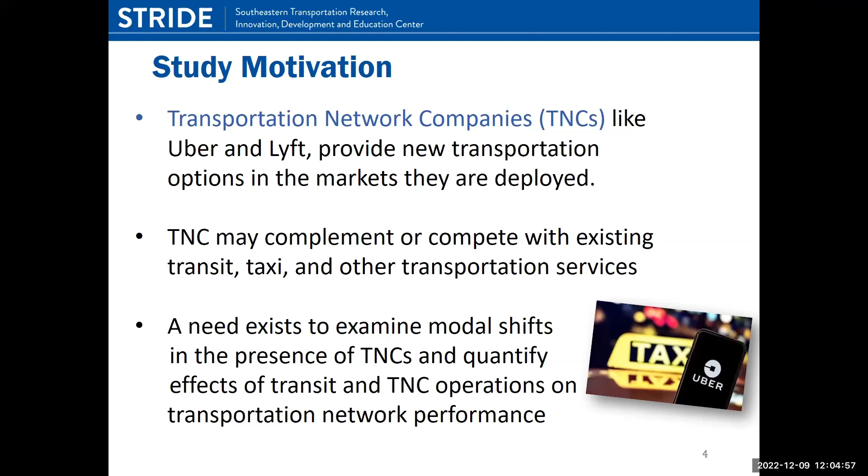So given all these earlier conversations around the impact of TNCs on traffic operations and transit, we identified the need to examine modal shifts in the presence of TNC services and quantify the effects of transit and TNC operations on transportation network performance. The objective of our project was twofold. First, to study the influence of transit and TNC operations on the choices of individual travelers, and then also to assess the impact of those choices on the performance of the transportation network.

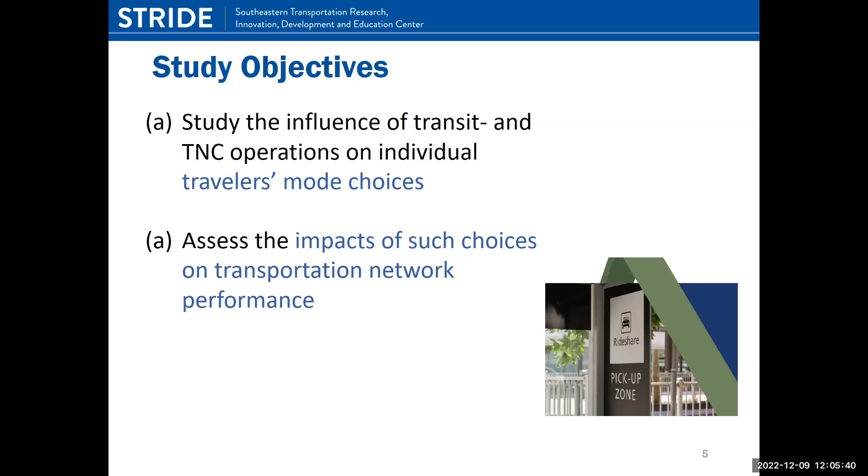In order to meet our study objectives, the research team performed 4 interrelated case studies that used Birmingham, Alabama, and Miami Beach, Florida as the test beds, and the MATSim agent-based simulation platform for modeling. We first collected user travel preferences data, then we developed novel methods for calibrating MATSim models using the mode split behavior model, as well as real-world traffic counts.

We also collected and processed Uber trip level data using crowdsourcing in order to address the lack of publicly available TNC data, and also modeled ride-hailing operations in addition to automobile and transit trips in the same simulation testbed. So our presentation will try to cover all these case studies.

I'll talk briefly about case study 1 that focuses on surveys of transportation users' attitudes and choices for ride-hailing services like Uber and Lyft. This case study used a questionnaire survey that was developed in Qualtrics.

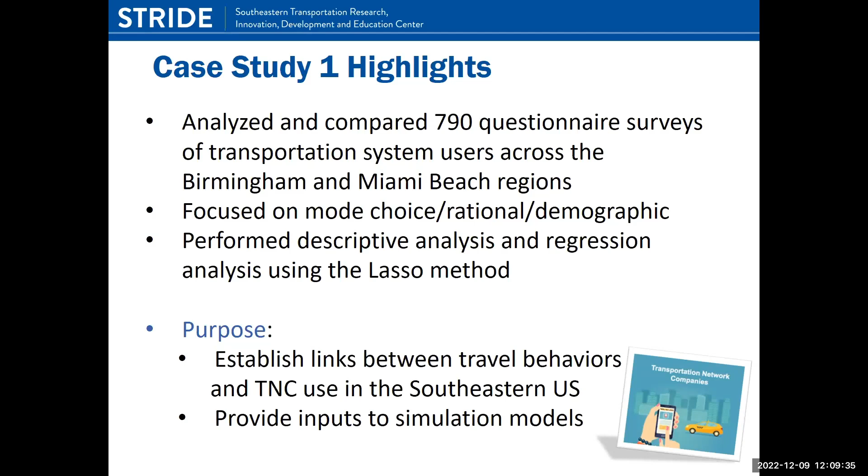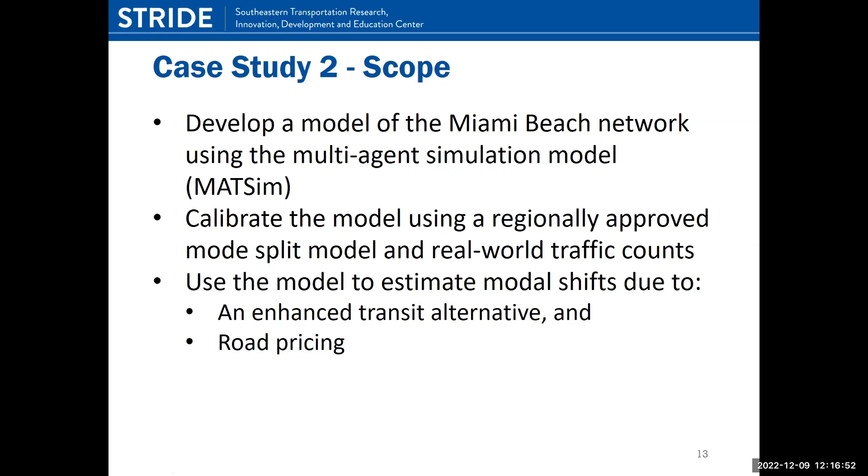By concentrating on a small case study of estimating mode shift due to enhanced transit service and also road pricing. The reason why there is some interest in multi-agent simulation is that existing travel demand models use static demands through the whole peak period, and we know that the demand varies.

The model also uses static assignment and static discrete choice model. By static discrete choice model, we mean that it is for the whole 3 hour or 4 hour peak period, and doesn't consider the variation every 15 or 30 minutes in the peak, deciding to do the mode shift or even an assignment, and also the trip generation and other factors.

Agent-based simulation uses traffic simulation and loops between supply and activity-based demand. So it provides a much more realistic and dynamic system.

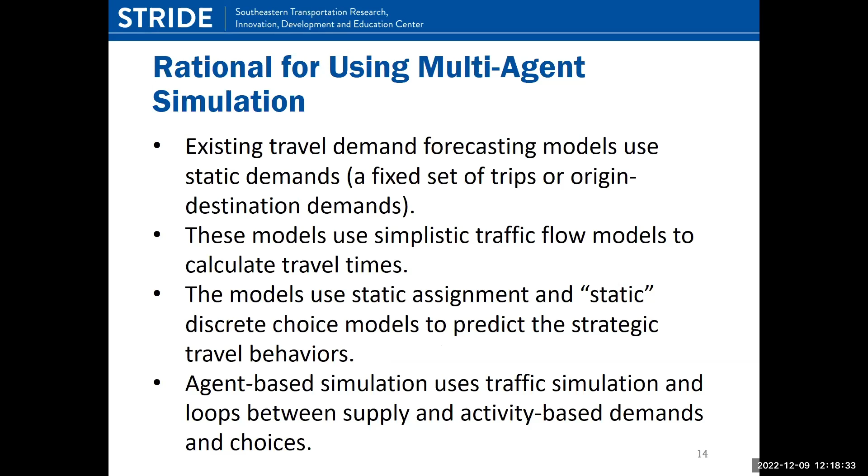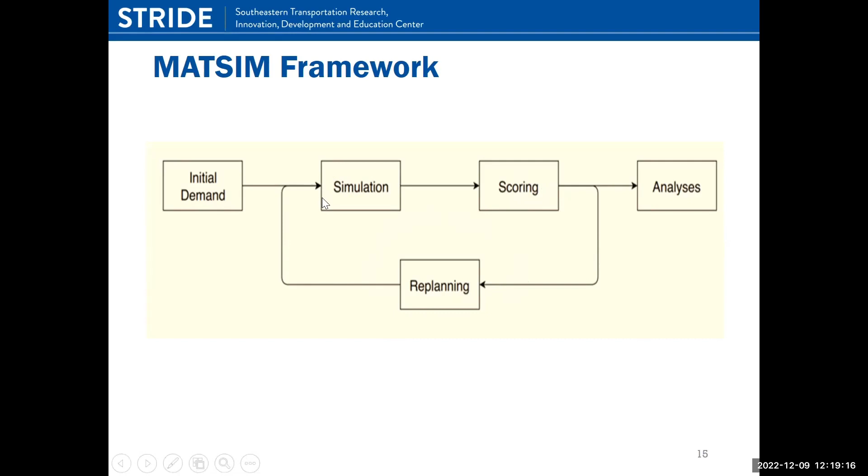A simple explanation of the framework is we start with an initial demand, go to the simulation, and it has a scoring function within the MATSim open source tool that scores the trip alternatives for each agent or individual in the simulation, then changes the activities of that person based on the scoring for that period of time. Then it iterates in the replanning step, going back and changing the mode choice, the demand, and shifting even the time of trip generation during the day. And this is the network.

It has a very congested network. Miami Beach has a mix of traffic, a lot of tourists, and also causeways - those ones on the left side. These causeways connect Miami Beach to the mainland, Miami-Dade County or City of Miami mainland.

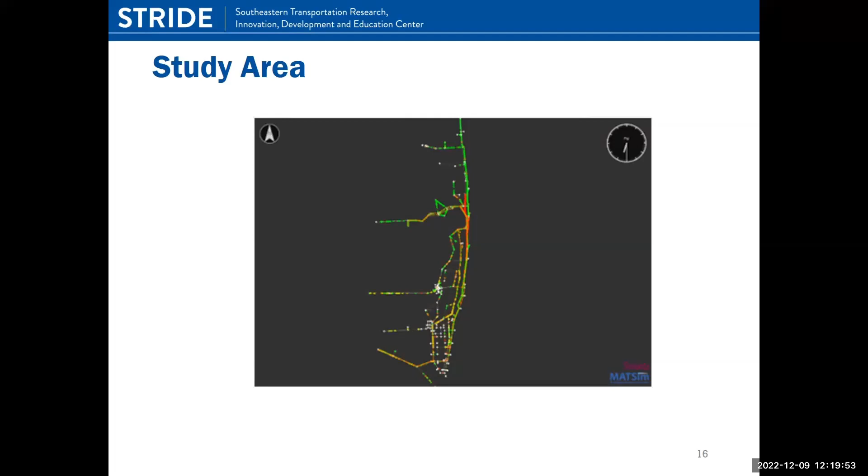So this is the area that we model. The data we obtained - the road network and demand model - we extracted from the demand model and converted to MATSim. Then we generate full day plans based on the activity-based model of the region's demand forecasting model. We also obtained information about public transit options like route profile, stops, departure time, service frequency, including bus services and local trolley, which is very popular with tourists in that area. And then we also have count and travel time data.

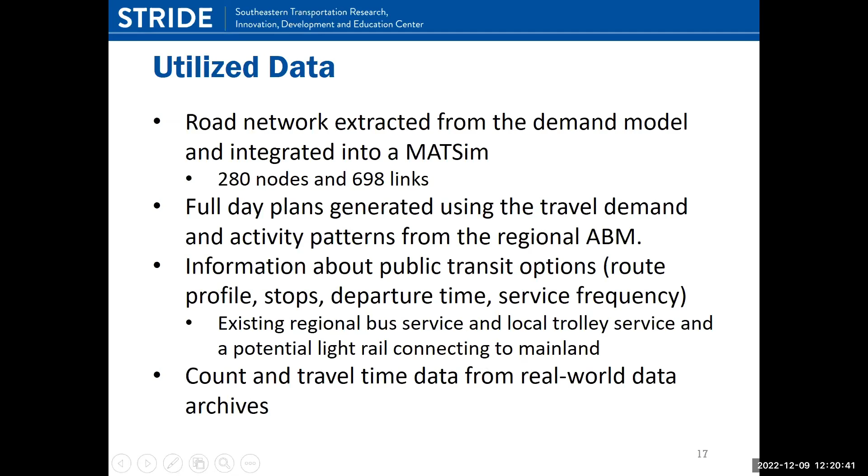Some of the parameters in the replanning strategies include the utility of time and money, and the utility of travel versus staying home, which is different for different modes, and then utility of distance and so on. These model parameters can be calibrated. Also, on the supply side, you can change the link capacity and the free flow speeds.

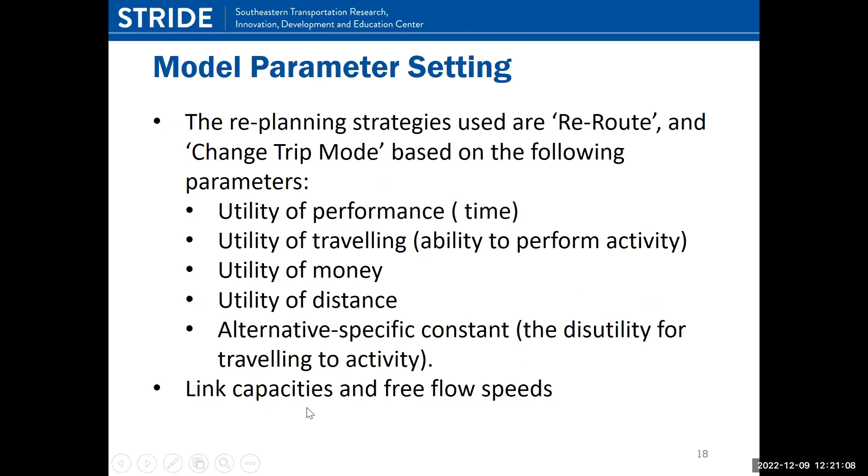This is just an explanation of the process of calibration. I'm going to talk about this in a little bit of detail. So one of the things that we did is to model in MatSim, as we talked about. MatSim has a scoring function, versus Cube which has a discrete choice model for mode split.

So what we did is perform an optimization to obtain scoring functions that result in similar results to what the Cube equation gives for the same static conditions. The idea is that the Cube equation is the accepted, calibrated equation for the region and so on.

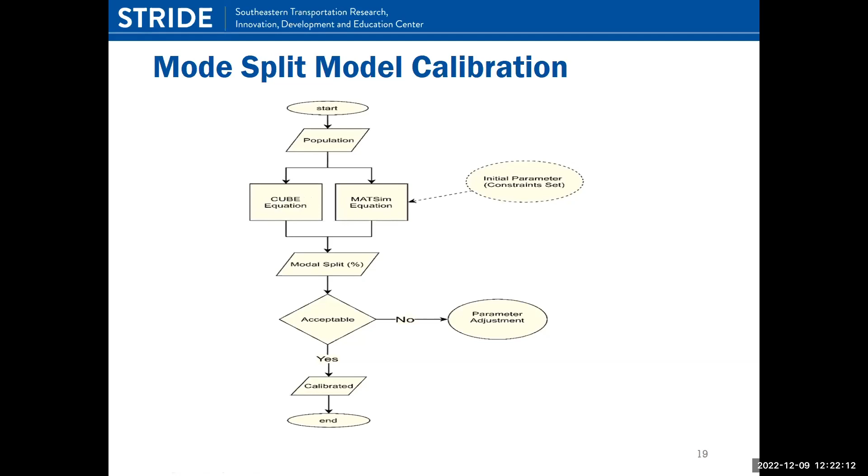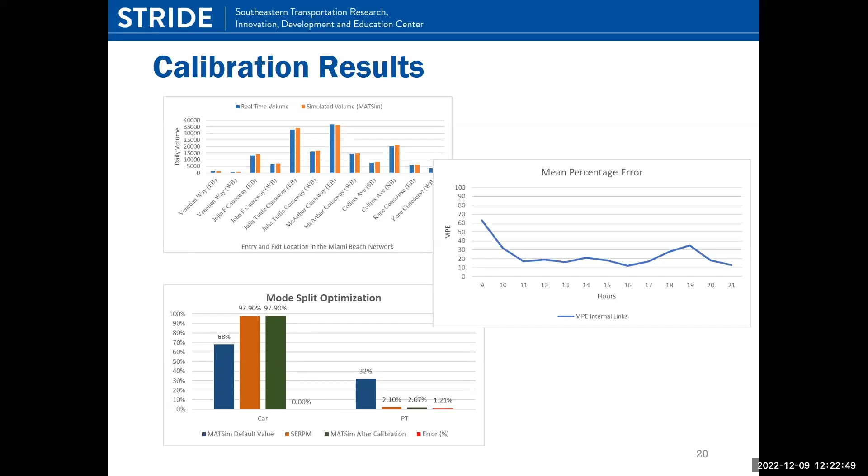We also calibrated the model for counts, and we were able to reduce the error, the mean percentage error, significantly. And even with the mode split, if we use the default values - MatSim was developed in Europe - so when we use the MatSim parameters without calibrating for the regional demand model, we obtained a 30% shift in mode split. It's 30% mode split, while it is much lower than this, about 3%, as we looked at.

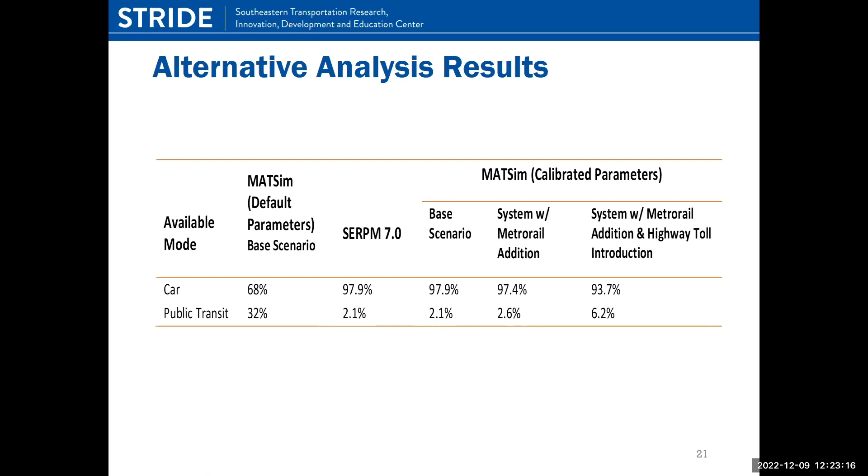Once we did that, the calibrated model produced results that are similar somehow to the SERPM model. And then after that, we changed the model parameters. We introduced a metro rail and highway toll to discourage people from using their vehicle, and based on that, we were able to see some shift in the demand.

So again, this was just a simple exploration. It is a significant effort to calibrate the model, but we were successful in doing that, and we found that it was effective based on traffic flow and mode split. The model was capable of estimating the shift toward public transit, and the effort could benefit from further fine-tuning of the MatSim model.

Further modeling is recommended of park and ride, kiss and ride, automated mover, first mile, last mile, collector, distributor, ride pooling, ride hailing, and micro-mobility options.

We actually tried to do some modeling of Uber, but we found difficulty in doing that, and because of the small budget and short time of the project, that was just an exploration effort. We decided to postpone introduction of Uber-type services in the model until a future effort.

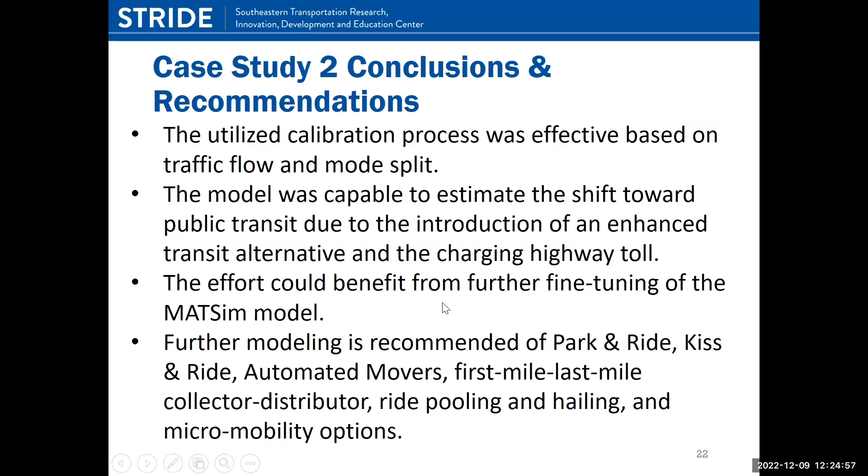The third part is about rich mode, in addition to private cars. We want to study what's the impact of, let's say, public transit, right? Buses and trains, and also TNC companies like Uber and Lyft, and how their impact is on the current traffic, especially since we are based on Birmingham. So how the new modes, the TNC companies and the public transit, are impacting the traffic in Birmingham.

We also explored new micro mobility services like e-scooters, e-bikes, shared mobility, where people can just use an app and grab an e-scooter and ride to their destination and just leave it along the roadside. So this kind of service, how it will also impact the traffic.

This is actually a collaboration with two teams as an interdisciplinary project between Dr. Virginia from transportation engineering and me from the computer science side. And of course we each have our groups. On my side, mainly Jalal is doing a lot of programming work, and we discuss those data science techniques to make things work. Jalal is also working on this kind of MATSim configuration.

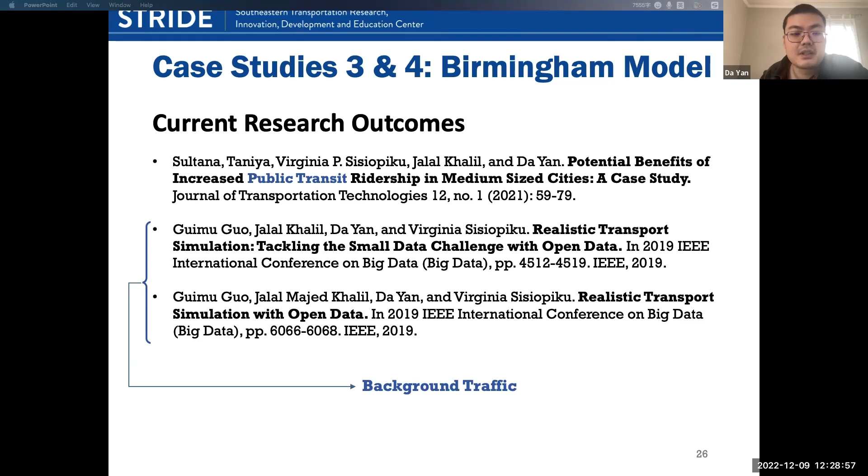So actually this research starts by needing to first generate the background traffic. We need to know the mobility habits and the daily travel plans for the population. Again, we are using MATSim, which is the blue box in the middle. MATSim takes, for example, the road network for executing their plans, the multi-agent plans for the entire population, and it's from OpenStreetMap, and also takes the day plans.

That's the major part that we're generating — we need to make sure the population day plans are realistic. It also takes some other things, like if you are doing transit, they have a sub-module for public transit. And if you're doing, for example, Uber, we are currently using a taxi module there — you can have a bunch of drivers keep waiting till there are passengers, and they will pick them up.

So the MATSim output is basically a list of events — what happens at which time, like somebody gets on the car, gets off the car, or turns left, turns right. All those details are actually recorded in that event file. Based on that event file, we can do all kinds of flexible analysis using data science techniques by writing Python queries to do some querying.

So again, even though the surrounding is MATSim, we are using Python mostly to do the data science analytics to generate the realistic plans or analyze the simulation results. The core code of MATSim is in Java, and oftentimes the modules are not that flexible, so we need to actually change their code and customize it to our needs.

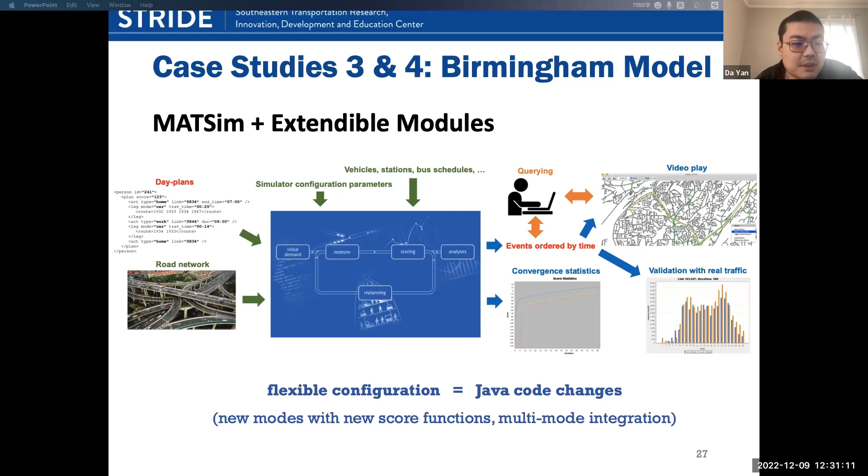Especially, for example, we have changes of some score functions, because if we integrate new modes like e-scooters and multi-modes are both integrated, then we need to adjust the original scoring function, which is the third step in MATSim in that loop. We also have a lot of configuration to do, and even need to change the Java code inside MATSim to make it flexible enough to work. And to study all those new modes, the first thing we really need is background traffic.

But to generate the agent-based simulation, you need to provide all those details for the entire population of Birmingham, for example. 500 people is not enough, so you need to extract their habits and then add back all those details. We really need diversified information. You cannot just scale 500 people to 50,000 by replicating them, otherwise they will all go from the same home to the same working place.

So, for example, we use OpenAddresses, the open data repository for all the addresses in Birmingham, in the United States at least. Specifically, our study area of Greater Birmingham contains two counties, Jefferson and Shelby, as shown in the lower left corner. We also use OpenStreetMap, which provides not only the road network but also amenities, so you can even find a Costco or a hospital or schools there. They provide a lot of rich POI, point of interest, information.

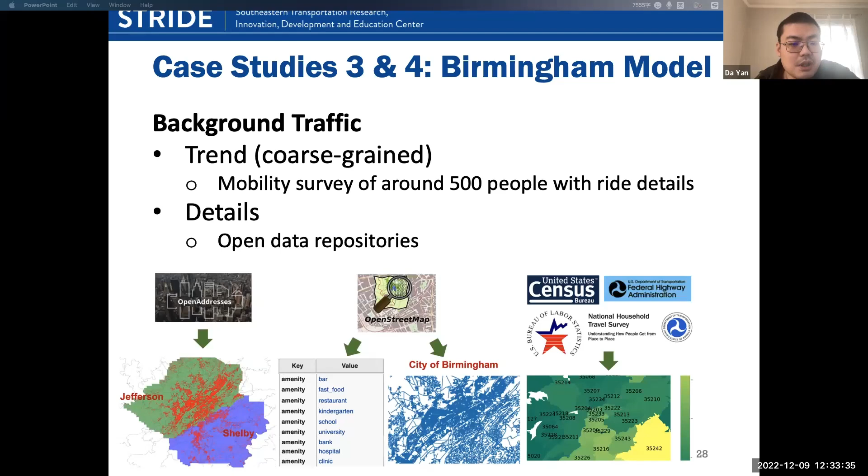We also have the American Community Survey and other information, so you can get the geographic and population density, etc. All of this helps complete the details of the plans we need to generate, on top of this small sample we have. But of course, we need to do a lot of statistical data science techniques to make them realistic.

We find that a lot of the traffic is generated by work, because if you think about the peak hours, it's really driving from home to work and from workplace to home. So we specifically model work as one of the most important activities. We also get the top employers from the Birmingham Business Alliance, the top 150 employers with a lot of employees. We assume this is representative of the work location distribution for Birmingham, and we generate a distribution following that, using kernel density estimation.

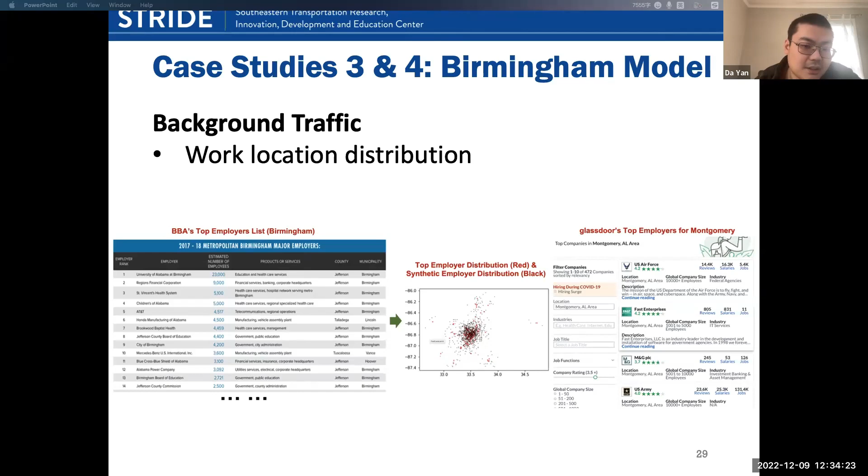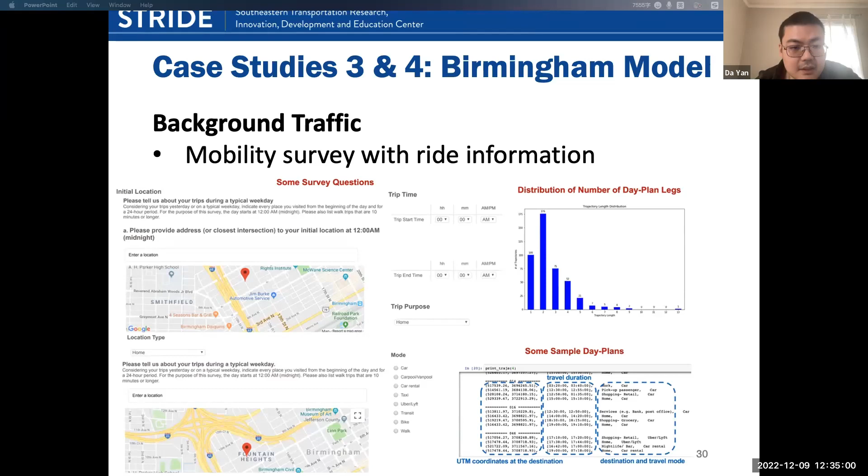We do some analysis and summarize the statistics there. From these 500 people, what we can safely learn is not, for example, their exact locations for each person, but at least we learn the distribution of the workplace and the home. What can be safely learned is their starting time and ending time for each activity, so if half of them are working, we can fit a distribution from them.

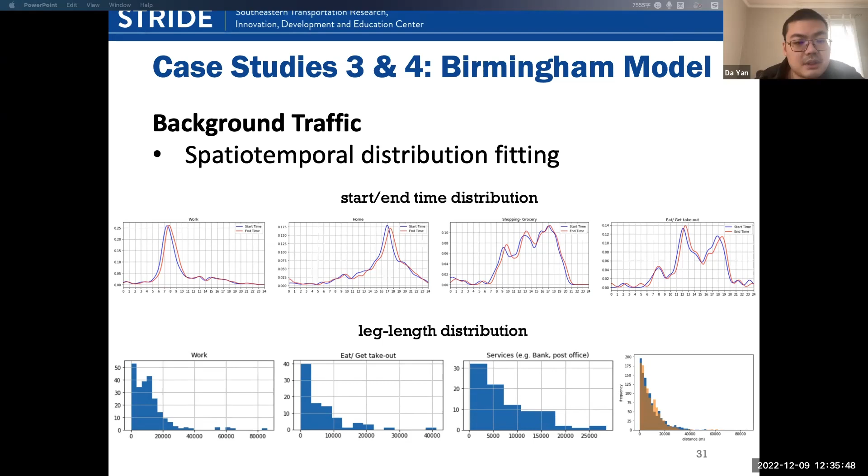Also the leg length, how long it takes for each activity. Let's say for work, how long it usually takes from home to the office, and if you eat in a restaurant, how far you're usually willing to travel. These things give us distributions that we can use later to generate the day plans for the entire population.

This is a background traffic generation pipeline where we use a lot of open data, and we use an IPF method, which is a kind of scaling method in statistics to scale the population. We group the population by zip code areas, which is already very fine-grained, and then scale them up to the entire population size.

And then we generate the detailed information like the time and the location for each leg, one after another, based on the conditional tree of the activities presented in our survey data. So basically this is more like a graphical model.

Following this, we can generate the entire population data, and then we can use them for simulation. The result is actually quite good - we verified it using real highway monitoring data, and the matching is reasonable.

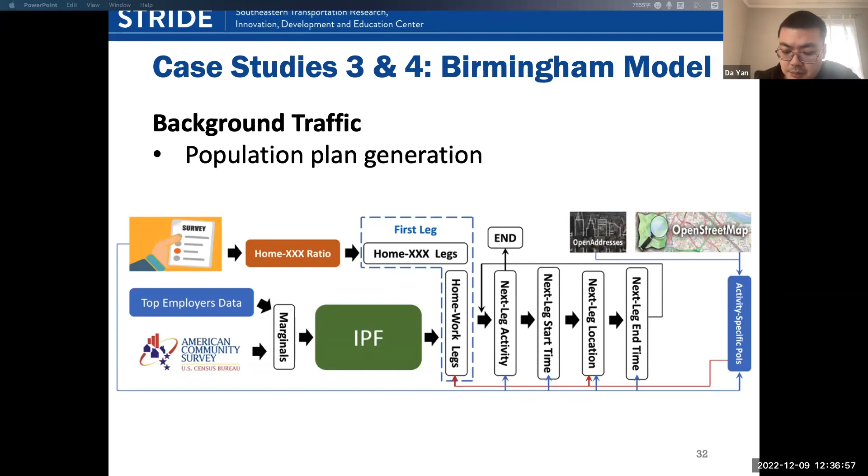Then we study a lot of the rich modes on top. For example, we have Uber, TNC companies. We also have public transit like buses, and e-scooters, e-bikes. Due to time limitation, I will just talk about how our recent work integrated Uber rides into our background traffic I just described. This paper was published in 2022 in SIGSPATIAL and selected as one of the best paper candidates.

So what we do is several steps. First, we collect Uber trip screenshots from drivers. The reason we collect screenshots from drivers instead of passengers is because drivers do not have control of where they ride, unless maybe they have control of the regions they want to serve. But the passenger really drives the actual source and destination demand. So it's more diversified if we just collect all the rides from the drivers.

This is an IRB approved survey, and we just get a screenshot, so there's not much back and forth questionnaire which would otherwise be error prone. Then we find people to annotate because we need to know the exact trajectory, time, and distance.

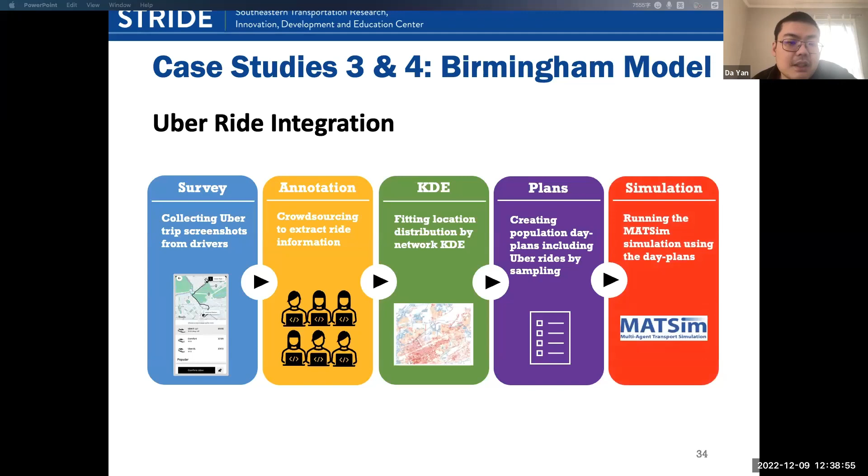Based on these trajectories of the Uber rides, we can get the distribution of the Uber rides - starting time, ending time, location - all on our road network. After which we can use these distributions to generate realistic Uber rides and Uber plans. Finally, these things can be given to MATSim to do simulation, and the output can be analyzed afterwards.

So here's what we do. We only found 8 drivers, because the study takes cost - we need to give them rewards. But each driver contributes a lot of screenshots because they're frequent drivers of Uber in Greater Birmingham. We collected over 4,000 screenshots there.

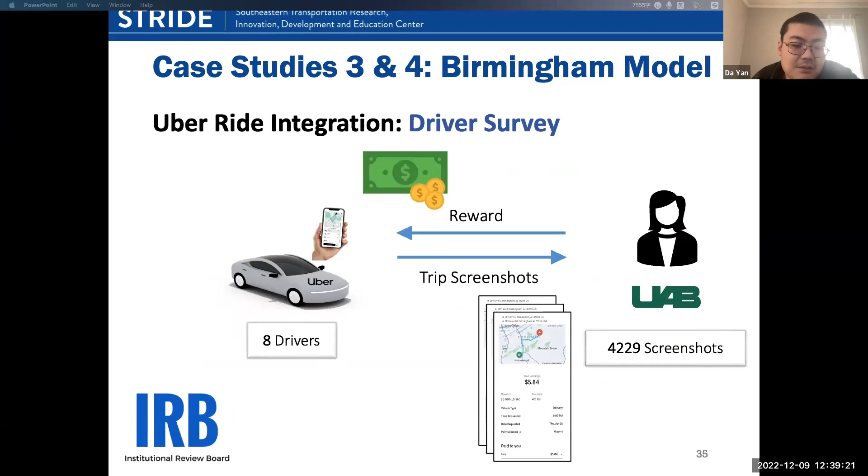What we can easily extract are the origin address and destination address, but unfortunately for privacy reasons, drivers cannot see the exact location. The driver can only see which street, which avenue, which road - you cannot see the exact location on that road. It's actually one-dimensional instead of two-dimensional, like a crossroad. So the address is vague, but you can see how long it takes and when the time is requested, so you can get the temporal information.

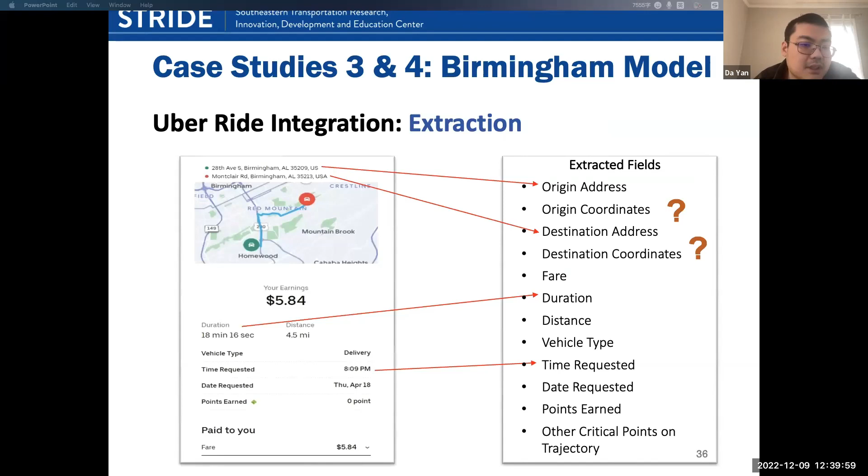But how can we get the exact coordinates, at least nearby approximate coordinates, of the origin and destination? The solution is to use a georeferencer, because in addition to the vague addresses, we also have their trajectory snapshot. Even though it's small, we can use some existing mapping services to find reference points to align them, and once aligned, we can recover the trajectory.

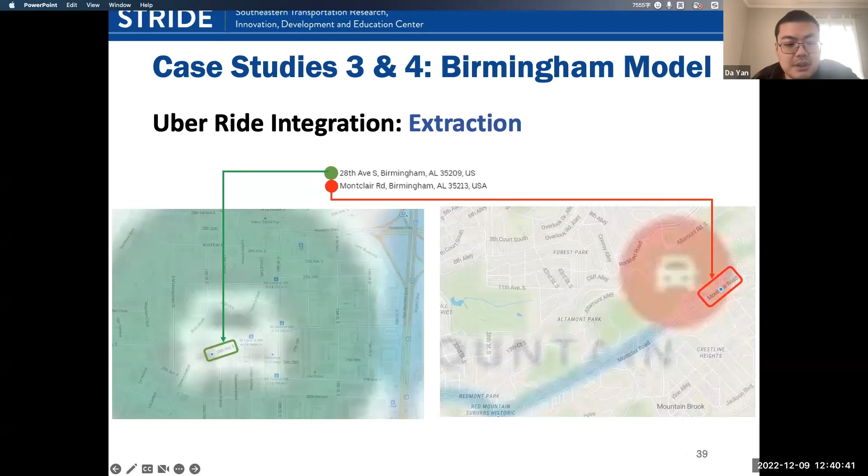For example, the green point is the starting point, the origin, and the red point is the destination. Of course they are very big circles after you zoom in, but then you can find the location on that street that they explicitly indicated.

So then we collect a few critical points on the trajectory and get the sampled trajectory points. Then we need to do map matching because these points may not be along the road, so we need to align them to the underlying road network.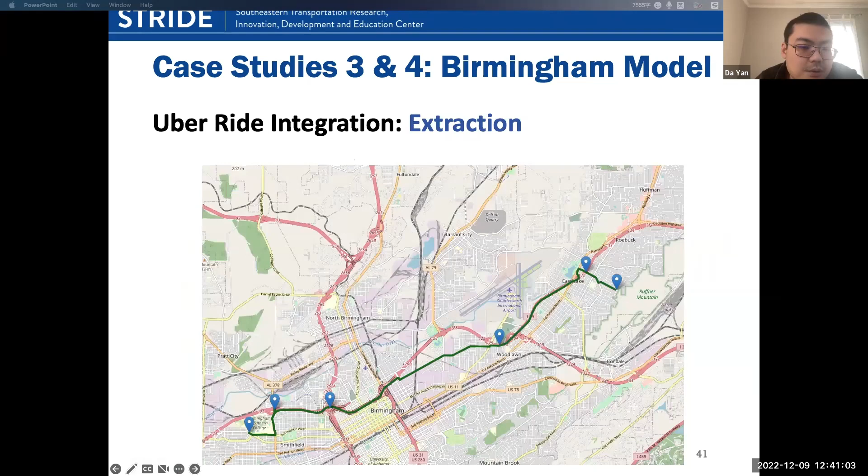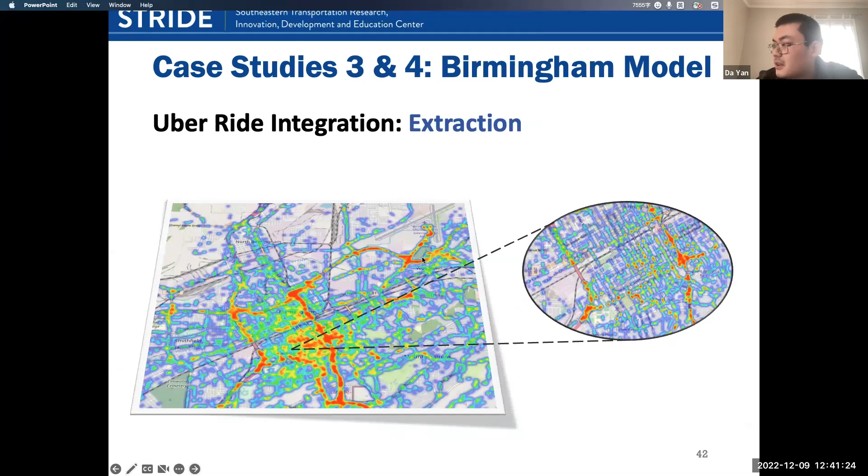Oh, I don't know why, so let me just click here.

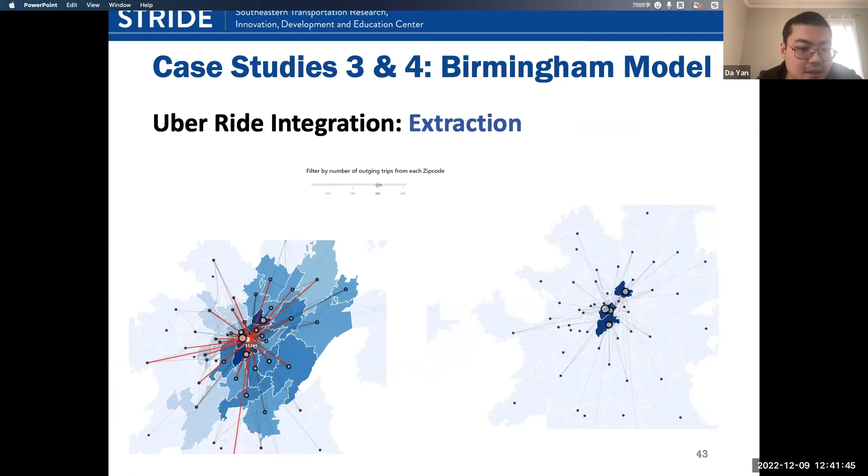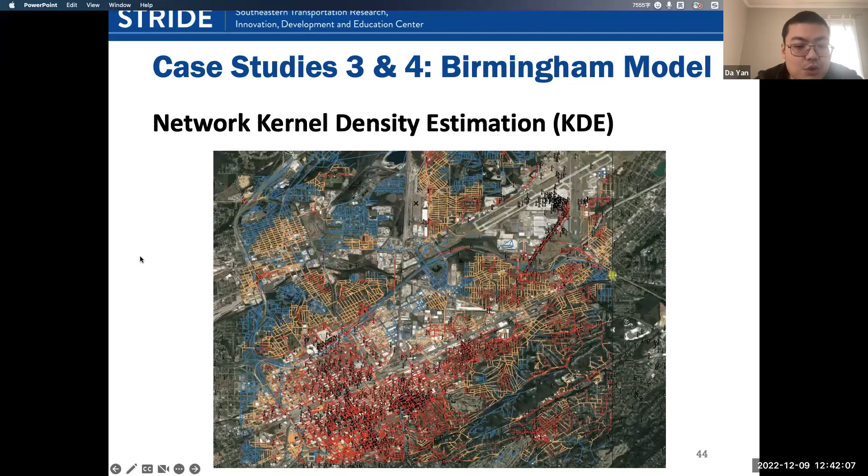Okay, so we also created an OD matrix for these different trips. And then we can cut off those low counts, and finally you can see it's either in downtown or in the airport. These two things are remaining. And then based on the statistics, we fit the distribution of, for example, where people tend to call Uber. The red regions are a high chance that people will call Uber, the blue is low, the yellow is medium. We fit this distribution, and from there we can then generate these trips.

And the distribution should not be just spatial, it should also be spatial-temporal. So we fit the distribution also considering the temporal aspect. So maybe lots of people are calling Uber from UAB when they leave work. But when they come to work, its destination is a peak. Origin is not a peak; origin can come from anywhere.

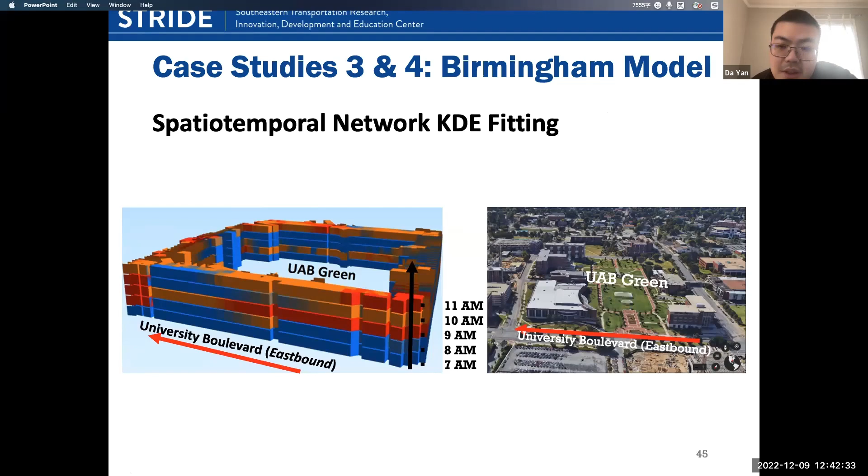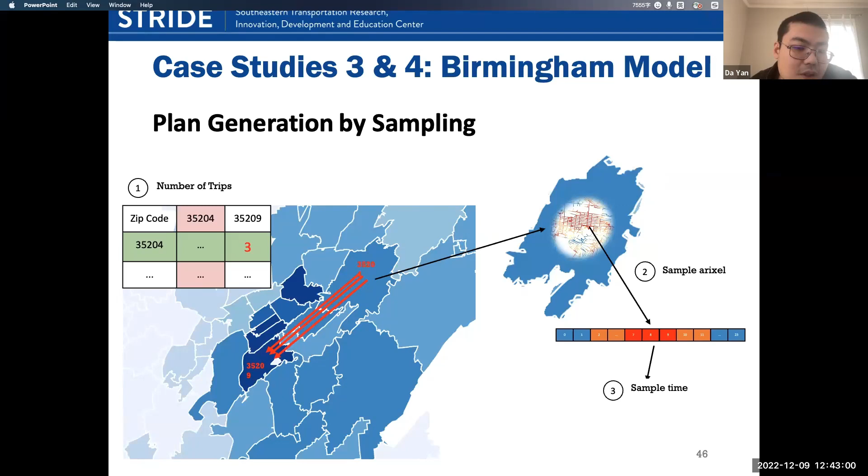And then based on these distributions, we do several samples. We can sample how many trips we need from that OD matrix, and then scale up, of course, using the IPF technique. So for each zip code area, we get a distribution of the origin, and we also sample the destination, but only on the conditional distribution where the destination time should be after the beginning time of the origin.

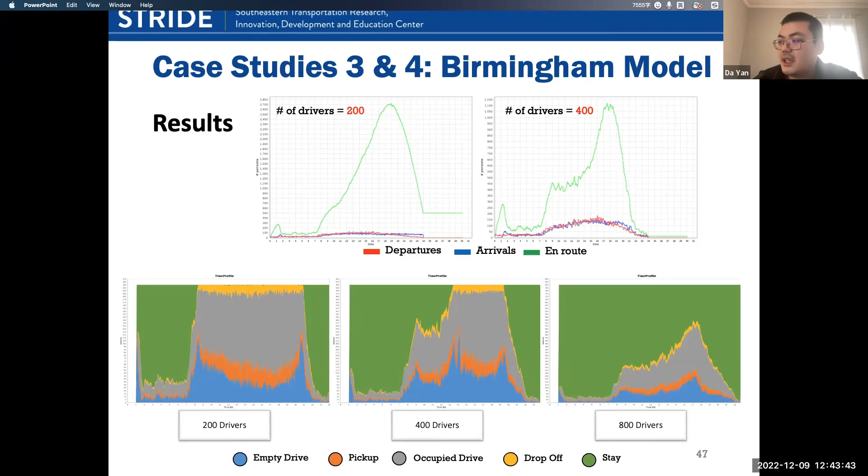We also did a study, and we find that if you only have 200 drivers for the entire Greater Birmingham, you can see in the top left diagram, the green curve never finishes in 24 hours. So we cannot meet all the demands. But if you increase it to 400 drivers, that's enough. And in the lower image, you can see that if we have 800 drivers, most of them are idle. But I think this is common, because not every driver is driving passengers all day long.

And we also studied the traffic on US 31 and one of the highways around UAB. We find that the impact of having this mode does not cause any congestion, which people have reported in big cities like San Francisco or New York. So in Birmingham, this is good.

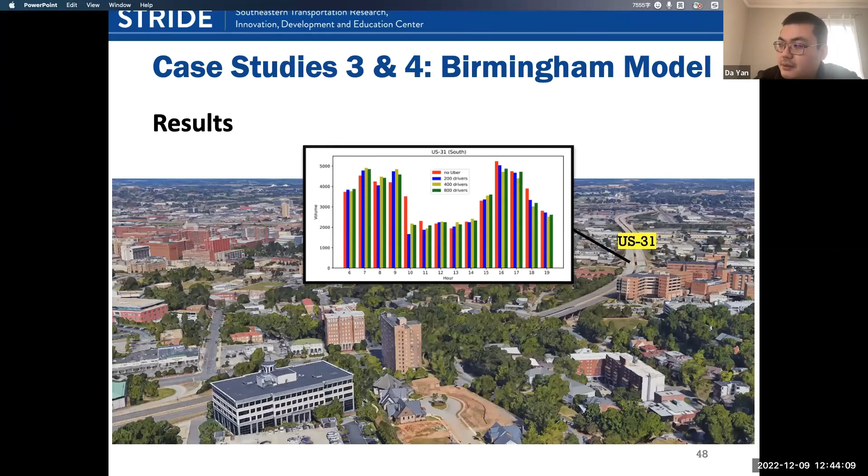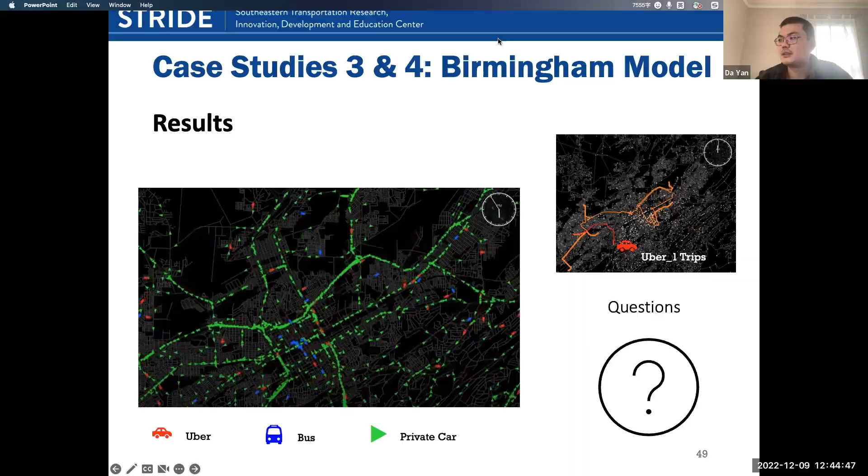I see a question in Q&A from Anna Kopp: the Cube equation you mentioned when comparing to the maximum scoring function is not something I'm familiar with. Could you talk about that a little bit more? Maybe this is to Dr. Hadi? Yeah, I think it's possibly to me. Okay, yes.

So the Cube demand forecasting model normally has logit models. Those logit models calculate a utility for each alternative, each mode, and that includes the cost, the travel time, the waiting time, the distance, and so on. Once you calculate it, you apply those utilities in the logit function, and you calculate the proportion of people that select each mode. And those are normally calibrated for each region.